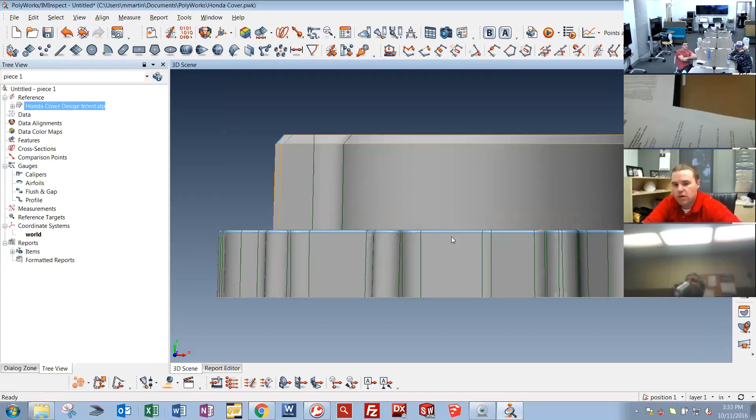Models in there. We'll go ahead and bring in the STL scan data. We scanned it with our GE CT scanner, and Josh Straden did that for me. Go ahead and bring in that.

And we're in inches down here in the lower right-hand corner. It's in inches. You can flip it to whatever units of measurement you would like. So I'm gonna keep it in inches.

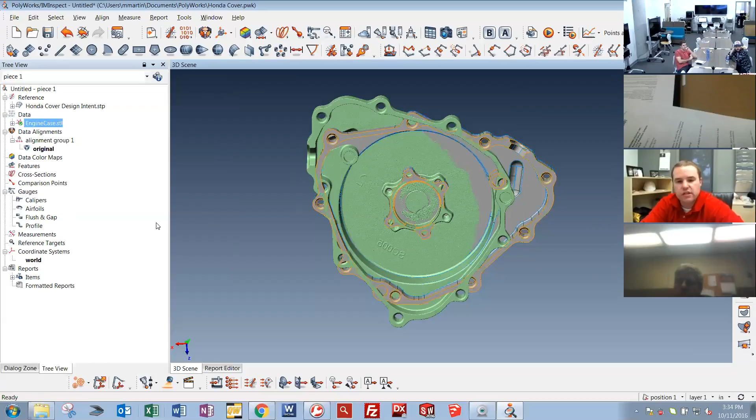So right now the gray showing is your CAD. That green, nasty green color is the scan data from the CT.

So I will run an alignment. I'll come up here to the alignment tab, which is these three little planes. I'll come down here to the best fit data to reference objects.

And I'll go through here and kind of set the settings before I run it. I like doing the pre-alignment with point pairs, just because I like controlling the initial 3 points that it picks. And then this max distance of 1 inch is way too big. We'll go down to like 30 thou.

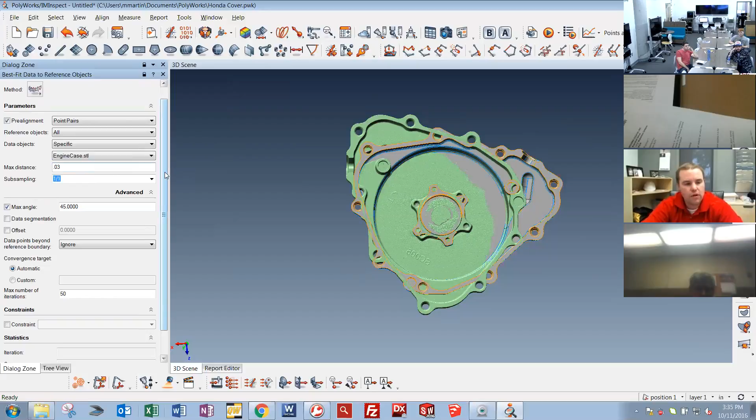You really want on your best fit, just go over a few things. You really want that a little bit bigger than your max error of your part when you're running a best fit. So you kind of want it a little bit on the higher side. And that's all set. And then we will run this.

So little brief overview of kind of what we did the last one. Go ahead and pick your 3 points. And then right click ends it, and now it's going to run through this algorithm again, running that best fit.

Close out that window, and now in the tree view, it's got the best fit to reference with the little green check. Again, means that it's programmable and ready to go if you were to change out parts.

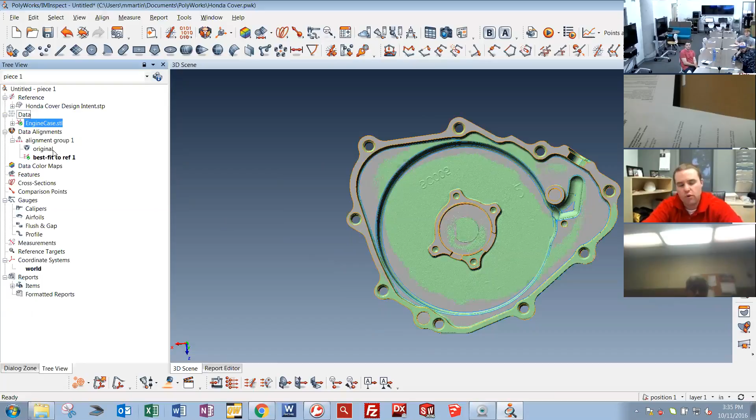I'll go ahead and apply the color map. Max distance of 1/2 inch, like way too big. Point 1 on the color map.

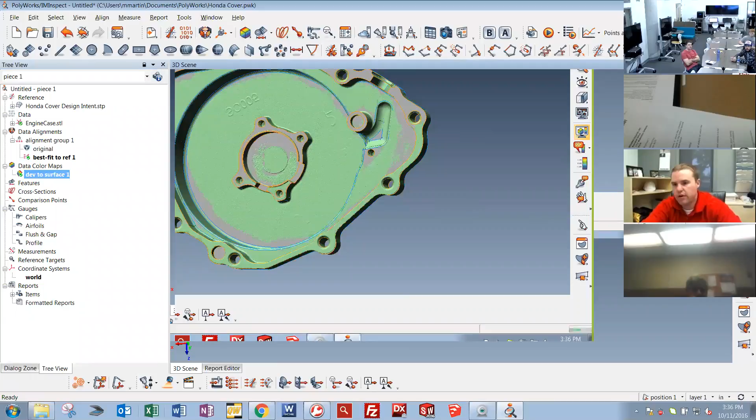And now we'll go in here, and I'm going to go ahead and adjust this scale. Right now, it's everything green is plus minus 1.5 thou. We'll probably put it at 5 thousandths.

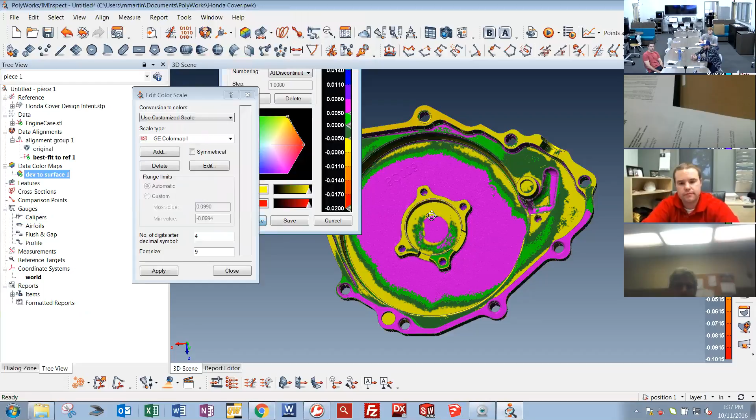And we'll put the max and min distances to like 20 thousandths. And I'll only do 5 colors in between them. That kind of makes that a little bit more realistic of what a part's going to do.

So now I'm going to turn the hide and show color map again on the right hand side. So I'll turn that off. And then, if you have a 3-button mouse, you can middle mouse click the STL in your tree view, and that's hide and show. So I'm going to hide the STL so that I can just start creating features on the CAD to do the datum alignment.

So what I'm going to do is create a plane for datum A, and then I'm going to go ahead and create a vector for datum B, running through this post, and a clocking point for datum C.

So what I'll do is come in here and create a plane feature. I'll turn on the datum feature label A, so that it gives it the automatic label. The method's going to be pick on CAD model, and right now it's single surface or multi-surface.

I'll just keep single surface since all of that is one surface. The reason you would do multi-surface is if it's broken up in the CAD, when it comes in, or the CAD modeler broke up that surface that's actually datum A or datum B or whatever feature you're picking. I'll roll the mouse over it and see how it highlights in white outline with green filled in. Click it, and then it applies, and now we have a plane there.

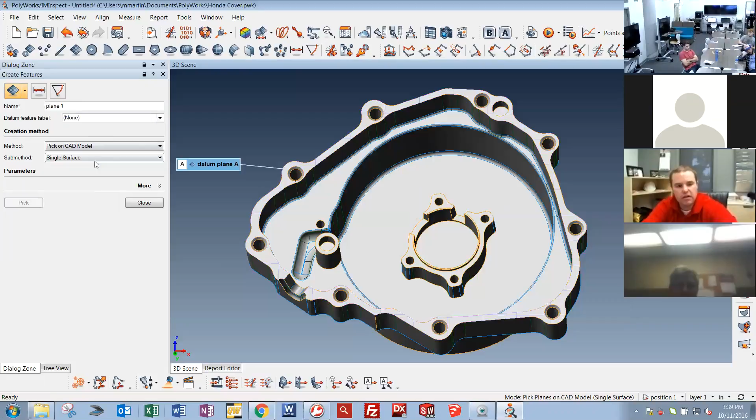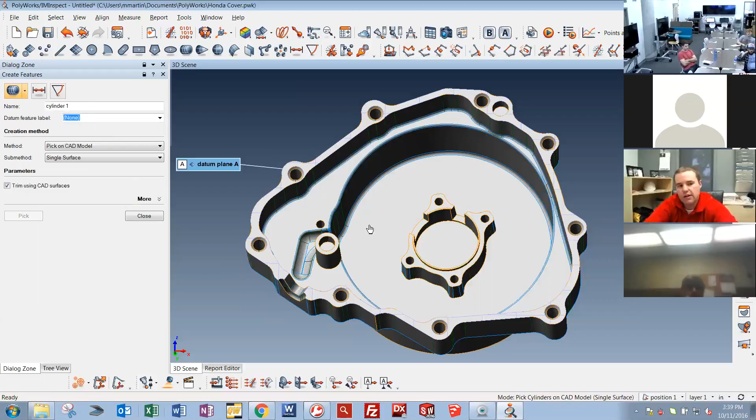I'll go ahead and change this to cylinder. We'll zoom in. So this is a pretty good example of it basically telling you it's not a cylinder, because it's not showing the green color with the white outline. So I'm going to go ahead and change this to a cone. And now it's telling me, yes, that is a cone feature that was used to create this part in CAD.

So I'll go ahead and change this to B on the datum label. Come back in here, apply that. Now we have B.

Now we'll go back up to the clocking pin for C. And what we'll do is I'll create a cylinder, just a normal cylinder called cylinder 1, by clicking that. So now we basically want this.

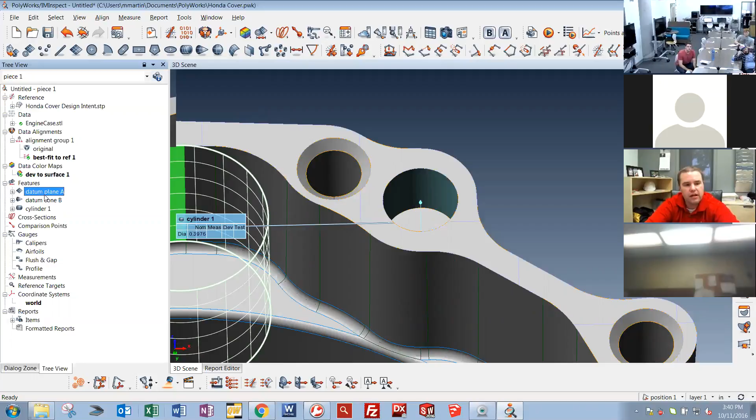intersection of the cylinder vector to the datum plane A. So what you'll want to do is select datum plane A, and then the feature it's intersecting. Have those selected in your tree view. Go up to whatever feature you want to create. We're going to create a point feature.

We're going to change the method to intersection, and the sub method of this one is going to be a plane and a cylinder. You have multiple sub methods in there to create points or create lines or create whatever you need. We'll go ahead and apply the C datum label and click create.

So now we have the 4 features used to create the 3 datums.

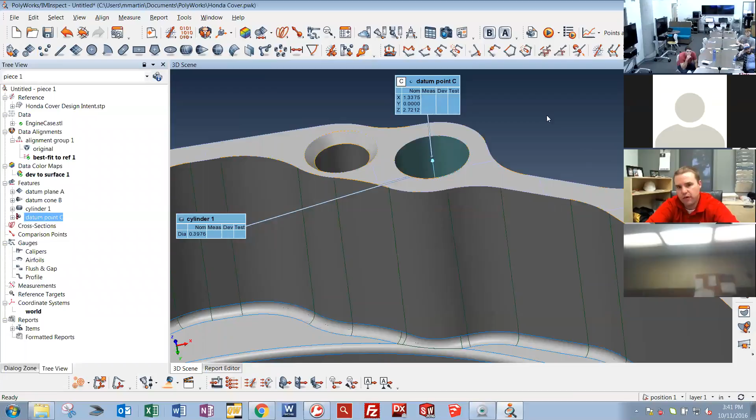What I usually do at this point, when I lay out the datum scheme first, is go back into the tree view and select all the features used to create the datum scheme.

And you can right click on all of them and go to edit group right here. That puts them all in a little group, and then I usually right click on the group and go down here to object group, rename. Now I'm going to name this alignment features. It just makes it look cleaner for people looking at your workspace.

It makes it look cleaner for anybody picking up the part. If you haven't inspected a part for a while and you come back, you can easily look in and see what the operator prior to you, or whoever programmed the part, put in that group real easy.

So now that it's all cleaned up and ready to go, we can start extracting these features, these ABC features, from the scan data to create the datum alignment.

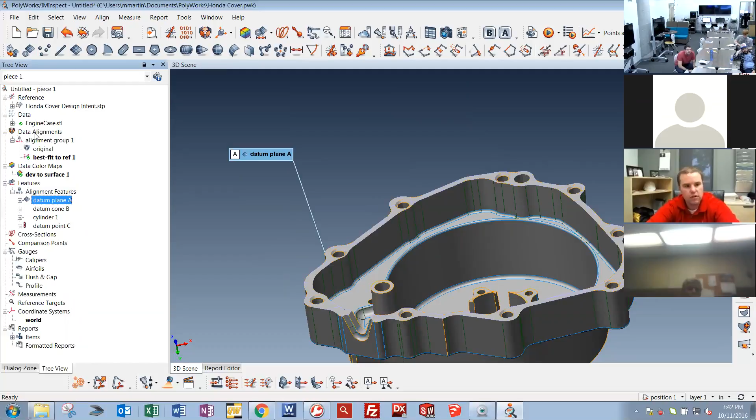So what I typically do is hide the step file, again with the middle mouse. I'll turn on the STL, right click and extract measured. Now with the little green check mark, it says it extracted it. It's ready to go.

One thing you would want to do as you look at your features in extraction is make sure that feature is extracted properly. So if you highlight the feature and hit Control M, it's going to highlight every point on that scan data in red that you used to create your plane. So you can go around and make sure there's no points, like you don't have a distance set that all of a sudden picks points down on a different elevation of where the plane should be, or that it's not picking them down here in the radius or something.

And then Control N deselects. So we'll do that on the datum B. We'll extract the measured.

And then again, make sure it's selected, Control M. Control M. And now we can kind of go back and look to see what point it used to create that feature.

Now, if for some reason you don't like it or it starts selecting points you don't want, what you do at this point is you deselect those points, and then you want to open the properties of the feature that you can start tweaking.

So we basically double click the feature, and you're going to have two tabs most times. Feature tab showing you, potentially if you have a datum label applied to it, a couple other little properties if you want, custom properties. But the main tab is going to be the measurement tab.

This is going to show you how the feature was created. We extracted it. You can CNC probe it. You can probe it or use nominal primitive. So we extracted it, we did a surface extraction.

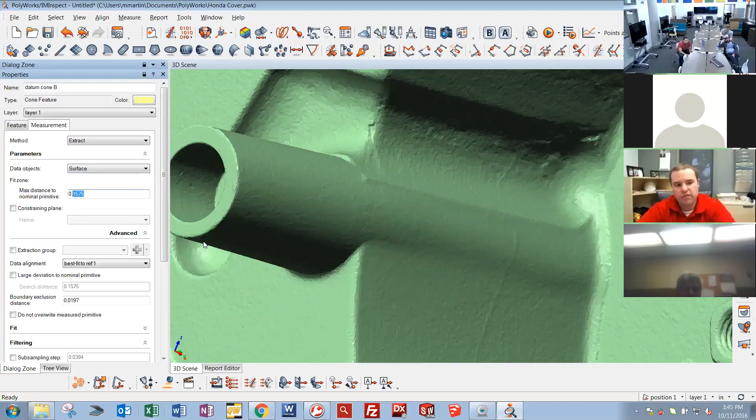And then we did the fit zone, which is a default fit zone of my settings. You can come in here and play with this fit zone, you can make it half an inch. And every time I adjust this number, in the background, because it's basically writing the program, it's readjusting that cone. So now, because I've set this max distance to half an inch, that's where it's making the cone.

So if you start readjusting, it's constantly updating, searching those points. So really, because this is a pretty accurate part, you could probably do 30 thousandths. So if we do 30 thousandths, Control M, now again you can see the points that it's looking at.

So really the main ones that we have to play with is if the max distance needs to be changed, or if you turn a constraining plane on, if you want to constrain it to a certain axis. The other one is the boundary exclusion distance. You really have to mess with this one when it's small features.

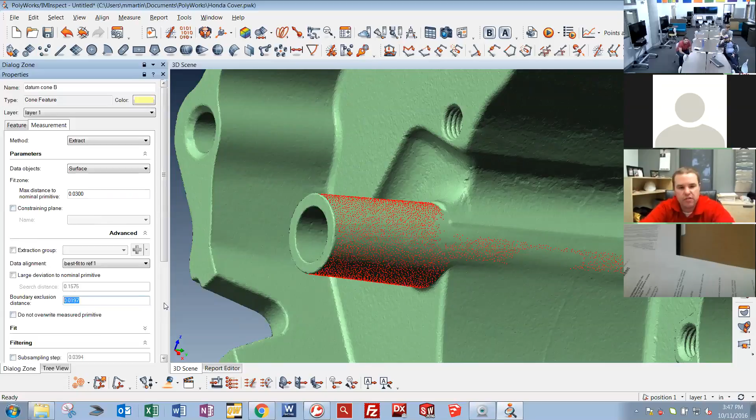When it's large features like this, it really doesn't affect the extraction. But if it's a small feature, which unfortunately we don't have any small features, like medical parts, very small like circuit board parts and stuff like that, this number needs to be really low, almost 1 thou or 2. Not almost 20 thou like it's default set to.

So depending on your part, 20 thousandths is fine for a machine part. On medical stuff, I'd definitely make that smaller, because what this does is basically deleting points from the selection to get a better sampling. And on small features, it basically deletes every point, so then it can't fit the actual feature.

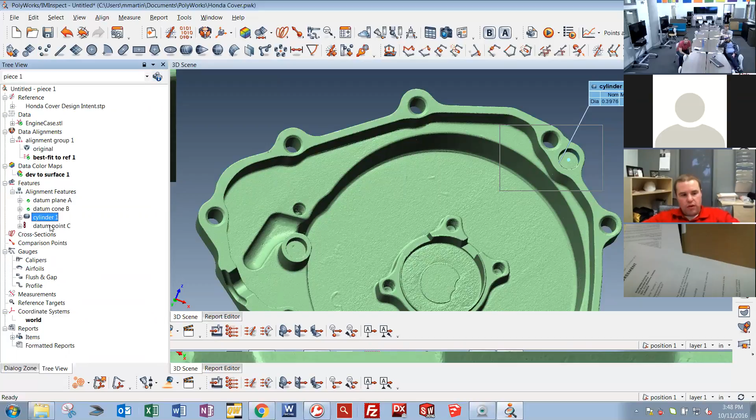Okay, and then we'll go ahead and fit this cylinder. Now, because the cylinder was used in correlation with datum plane A to make the point for C, it has this little relationship chain, which is in Polyworks called a dependency. So it's dependent upon these features being extracted. As soon as I extract cylinder 1, it'll automatically make datum point C.

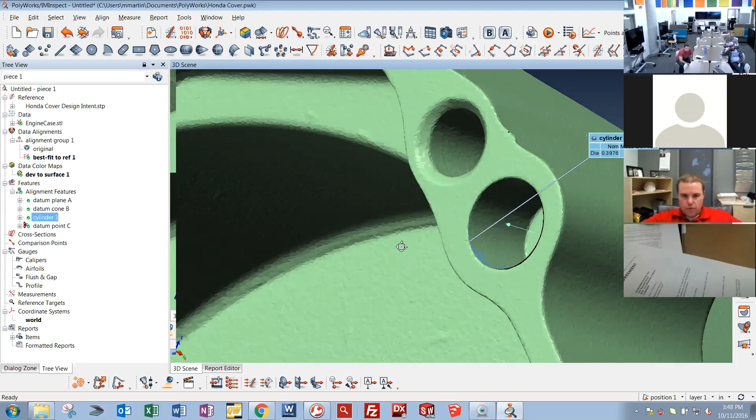And now we have the datum C nominal and measured point ready to go. So we'll go ahead and check that extraction, make sure there's no points being pulled from anywhere that I don't particularly care for. That's all good.

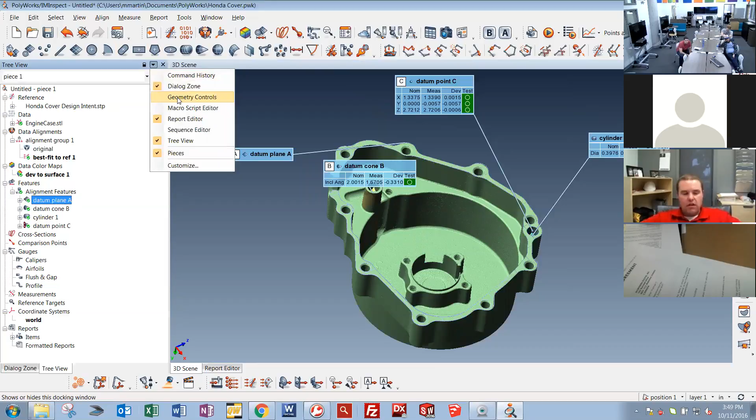What I usually do too, just to make my workspace look cleaner, is I turn off all the callouts that are on by default. So in order to do that, the easiest way is there's a little triangle menu button in the tree view. You can hit that, go down here to your Geometry Controls and open that up. So now when you go down to like datum cone B, you can see the angles turned on and it's showing up in your 3D space.

You can hit the Add Remove Dimensional Controls button and then just uncheck it. And I'll do that for the cylinder to take the diameter off. And then I'll select the datum point and turn off the XYZ of that datum point. Again, this is just personal preference stuff that I kind of do when I'm setting up a first article inspection. And if you hold Alt, you can move these anywhere you want.

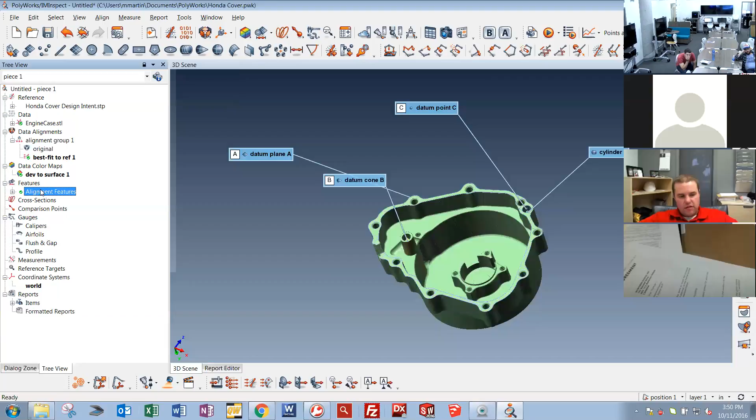So now, since we have all those extracted, I can now run the datum alignment. Come down here to the very bottom, the datum reference frame alignment. We'll go ahead and do a create. Again, you can create your ABC alignment any way you want it. We could do CBA, BCA. We'll just do an ABC. As soon as you create it, it's up here as one you can select.

And we'll click Align. It automatically, that little bar that went off pretty quickly, updated the deviation map to show the deviation now in the datum alignment. So now if we right click and say activate on the best fit, because now you have a datum reference frame alignment ABC and the best fit, activate. There's your best fit. Activate the ABC again. I can definitely see some differences in the color map for sure.

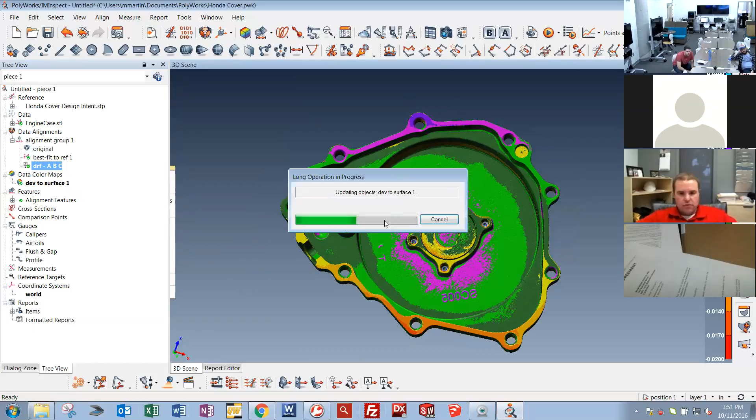So now we'll create some more features on this thing and start pulling some dimensions. Go ahead and turn off the color map, turn off the STL, and turn on the design intent.

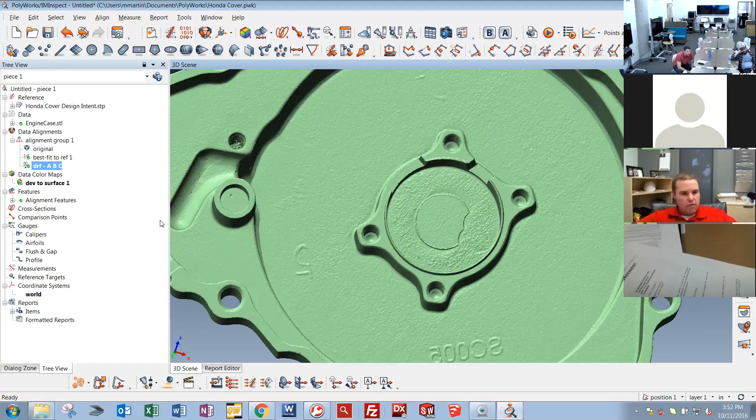What I want to do next is create a pattern on these four locator threaded bolts. I believe they're threaded in the scan data. Yes, they are. So what I will do is create 4 cylinders.

Go ahead and hit the Create Cylinder button. Again, the method is pick on CAD. It's the easiest method you'll do in Polyworks, pick on CAD when you have a nice CAD file. You can just go around and basically with 1 or 2 clicks get all the stuff you need.

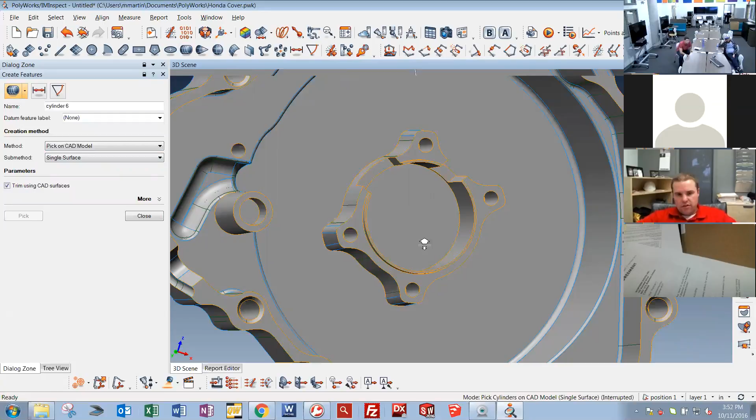Now that I have these cylinders created, you can create a pattern by selecting them all in the tree view and hitting your create pattern feature. Most of the time a pattern is another datum, so I'll just name it datum D4. Now it automatically ropes all of the 4 cylinders into that pattern. So you can apply this.

Basically what the pattern gives you the ability to do is apply, like a lot of times you'll see a pattern of bolt holes that have a true position back to A applied, or some type of call out. Usually it's a GD&T call out in the pattern.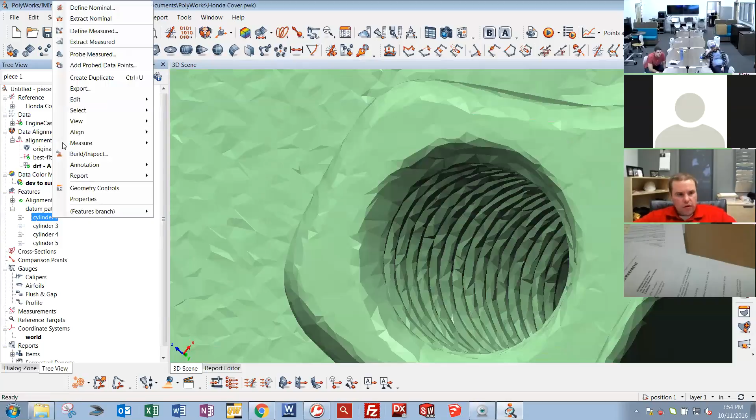So now these will be a little bit different extracting because they are on threaded areas. So we'll just start with, I don't know if you guys can kind of see that the CT data got all, there's little threads in there. So we would go ahead and just start extracting.

This one I definitely want to check because of the threads. There's definitely a difference in there, but what you can do is hit this plus sign on cylinder 2 and actually open up and see the nominal and measured cylinders by themselves. I'm going to middle mouse click on that nominal to hide it, and now I can really look to see how that cylinder 2 measured data is fitting visually.

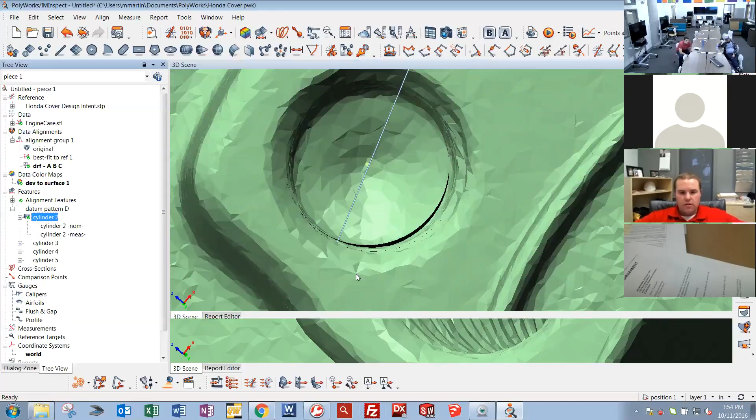And then I'll turn it off again so I can do the Control M to really look at how it's fitting. I particularly don't like doing a best fit on a threaded hole, I'd rather do a min fit.

So what I'll do is go into the features of the cylinder, into the measurement tab, and I will change the fit settings. Below the boundary exclusion distance we went over before is this fit tab. You can open it up and you've got fit types: best fit, min fit, max fit, with the ability to change it. I really like doing the min fit on the threaded hole, so I'll go ahead and change it.

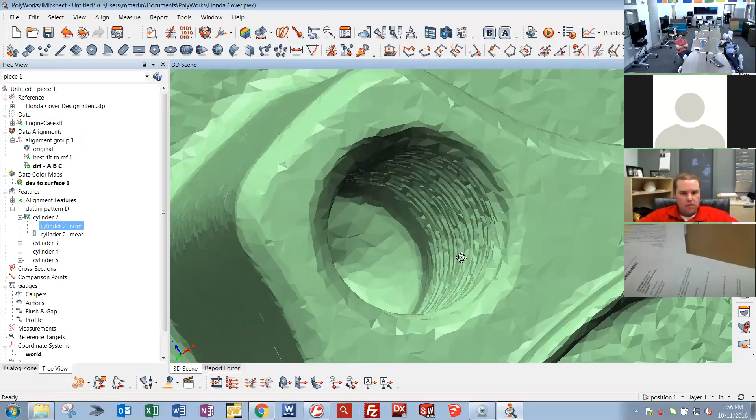It's in red telling me I've made a change but haven't applied it yet, so you can either hit enter or hit the apply button down here. Now it's applied, and now it's fitting, just barely hitting those grooves of the screw hole, the threads. So now I know that's a pretty good setting.

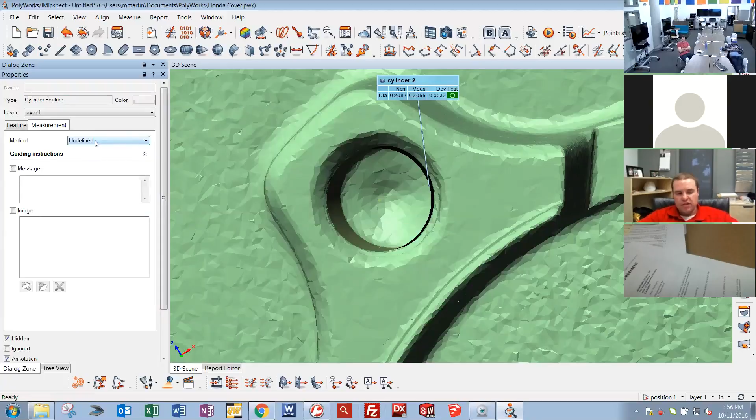I'll go ahead and select the next 3 cylinders all at once, right click and go to properties on those, then go to measurement. Because I haven't extracted any of these, it's asking me, the measurement is now undefined on the other 3 I haven't done. So I'll change this to extract, and then also come down here and change that to min. Go ahead and get that all set up, so now when I extract these, they will all be min fit cylinders.

So you can select them all at one time and just hit extract. We'll go ahead and turn off the nominal cylinders and just make sure those cylinders are fitting in there pretty nicely. Yep, this will look pretty good.

So now we have our 4 cylinders, got the pattern turned on as well. But now I want to create a couple more, 4 circles around this thing as well. So I'm going to end up creating a plane, a multi-surface plane, and then go ahead and create the circles from that.

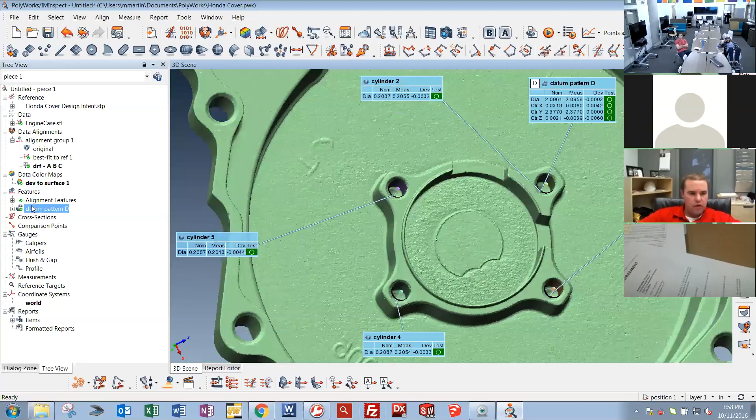So we'll go ahead and turn off all that, turn off the STL, turn back on our CAD cover. I'm going to fit a plane, pick a plane. Right now I have it on single surface, but really I want to make sure I get this surface as well over here, so I'm going to change the sub method to multi-surface.

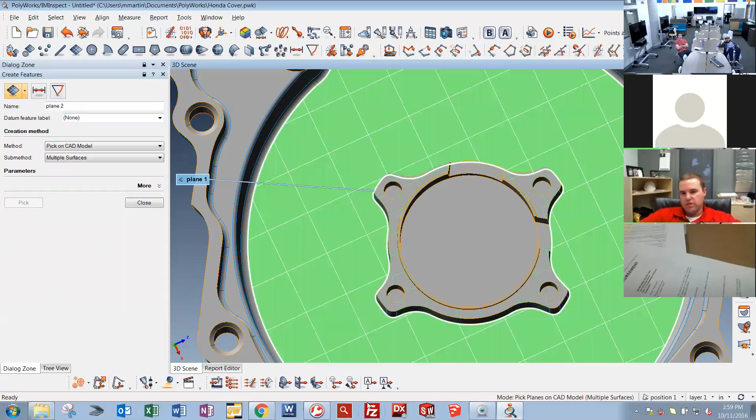So you'll click once, and now I can add this surface over here, so now it's got both surfaces selected. You click it, left click again, and then right click to end the selection. So now it's got that entire surface being used as plane one.

We'll go ahead and extract that plane as well, and do a quick check of the plane, make sure those points are not being taken down in those holes, which would be my biggest concern.

Now what we'll do is we'll create the 4 circles from the intersection of the plane and cylinder. So I'll select all the cylinders, select the plane in the tree view, go back up to the circle feature. We'll change the method to from intersection, plane and cylinders, click create.

Now kind of a tip is, if for some reason it says it cannot create a circle from the cylinder or from the intersection of the cylinder and plane or cone and plane, what it's really telling you is it's not a true circle from that intersection. So if you just change it to create a slot or an ellipse, is what Polyworks calls it, it'll create an ellipse. It's just not a perfect circle, and that's an error sometimes that pops up in Polyworks, more or less telling you that your intersection point is not perfect, so you therefore need to create it as an ellipse and not a circle.

So now we have those 4 circles created that, again, measurements may need to be pulled off of the circles, or just getting the XYZ points of that exact location of the top of that threaded hole compared to the plane surface.

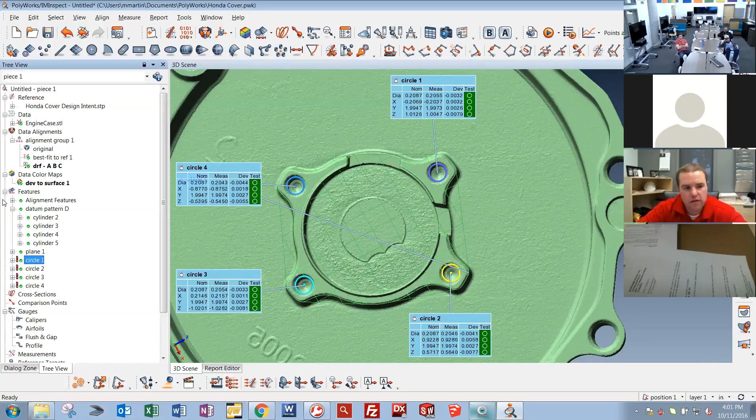Now what I can show you is, say you didn't have any CAD and you had to actually still take measurements. So we'll go on the back side for this. Say you needed to define this plane and this plane because you wanted to take an overall height measurement. So what you would do is, if you didn't have the ability to have CAD for it, which makes it easier because we pick on CAD and then extract, you would actually have to go in here and create the plane feature.

Change the method to fit, and at this point you would want to set up all your settings. So do you want a best fit plane, a mid plane, max plane? Same thing with cylinders or cones. The max angle, do you want that on? Usually yes, because you don't want it to be backwards facing. Do you want reject outliers, it's on by default, and that's pretty good, 5% of points. The subsampling step, sometimes if you have a huge surface that you're trying to fit a feature, you might want to turn that on to sample it down a little bit.

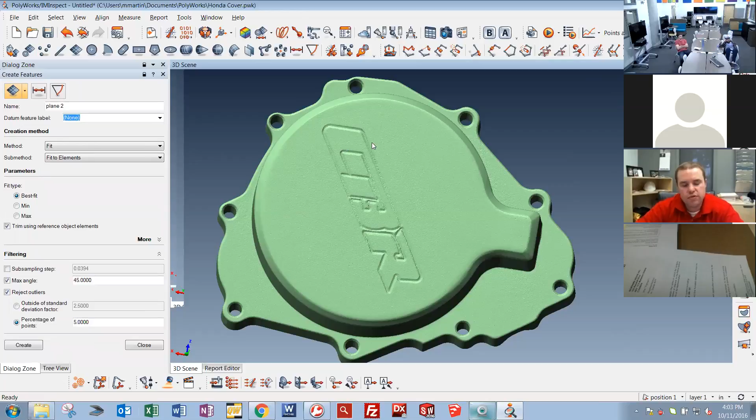So once you get all your settings, the right type of fit, you'll come in here and hit the space bar. That turns on the selection ability of your little ring. Now you can come in here and hit your left mouse key and start basically doing a slide selection, just basically painting the surface where you want that plane to fit and what points you want that plane to use on the fit. So once you've got all your points selected, you just hit create. And now your feature is created.

What you'll notice when you're doing this is it's no longer like a trimmed surface that you can use. Now it's kind of just an oddball looking feature. So we'll go ahead and do it again down here.

So it's a lot more time consuming if you don't have CAD to take measurements. It's something on the service side for Exact that, if we have CAD, we know it's going to be quicker doing a first article. If the client doesn't have the CAD model, we have to take that into consideration when doing these, because it's a lot more man hours spent of the guys going in there and selecting the features manually and doing this kind of work and building. Whereas if we have the CAD model, it's an easy click and you can get your settings set.

So I got a pretty good sampling on that surface. We'll go ahead and just do a best fit. Create. Now that plane is down here. And you're still doing the same type of application. You can go back in and do the Control M and look at the points that were used to create that feature. So that's still relevant, and you're able to use that.

One thing to take in mind, depending on the technology you're using, the method, we did pick on CAD, we did fit. You can do anchor, and anchor basically is anchoring 3 points. So anchoring, you would come back in here and say, I want this point, and this point, and it's going to anchor, it's going to build a plane based off those 3 points. You can also do pick one on the surface, pick one on the reference boundary. Those are options if you need them.

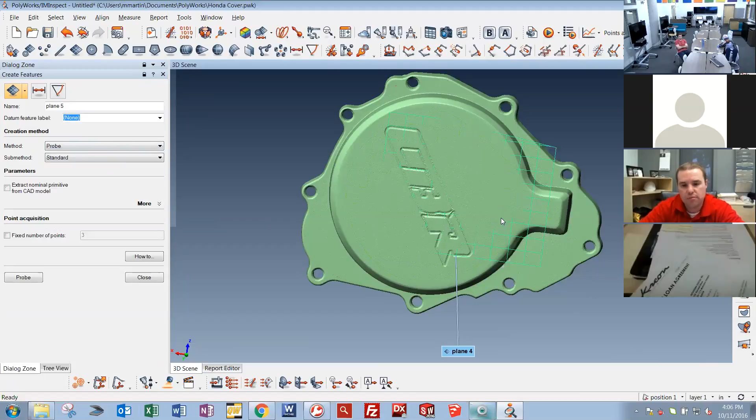The other big option is probing. If you have a Romer arm, you can change this to probing, plug in your Romer arm, and basically start probing all kinds of points to create a plane, just like a traditional CMM.

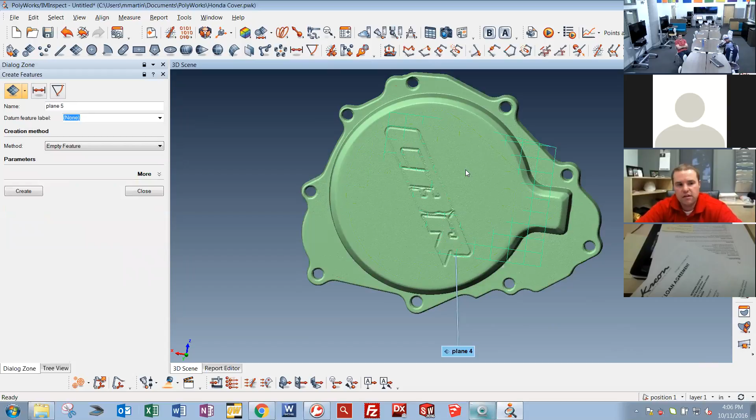The numeric, the empty feature is used for when you need to do a little bit of programming. We actually had to use it today for a part when we were creating a probe, simulating a probe type of thing, where we had to create a little sphere.

And again, from objects is the other one, and that's a sub-method of basically how am I going to create that plane. Is it going to be from the center points of circles? Is it going to be from a point in a line orientation? I bet you there's 20 to 30 ways per feature to get created.

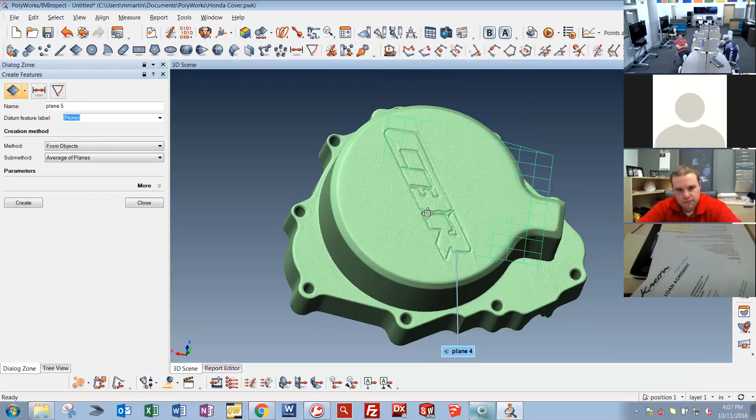So if you say from objects, we can do that one real quick. If I take these 4 circles, and they're all moved around, what we'll do is create 4 points, and then I can use those points to create a plane on the feature. So from objects, create points from objects, circle centers, create. And we'll use those same points to create a plane.

So really, Polyworks gives you the ability to build features off of features. You just have to go about it in the right kind of steps and know the right features and what they are.

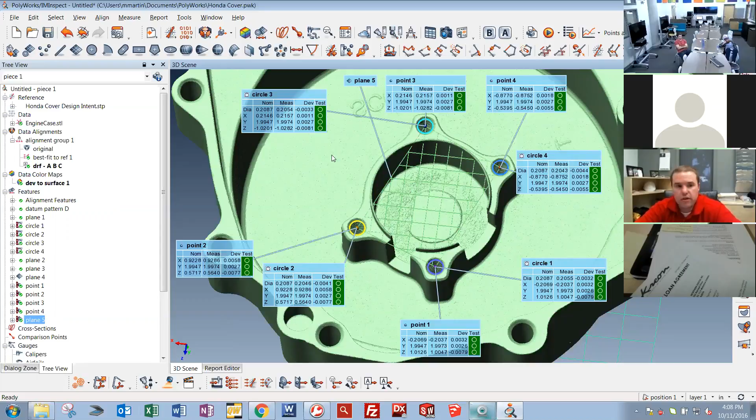Some issues you'll run into are with CAD files. You'll think the feature should be a cylinder and it wants to fit a cone. And like I said before, sometimes you'll think the feature is a circle and it will want to fit a slot. That's just the way the CAD model is. That's not an issue with the translator in Polyworks, it's just how the CAD model was built in the CAD package of choice.

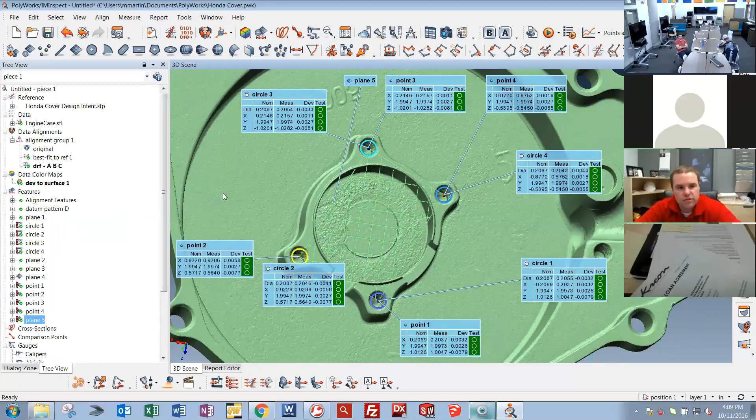There's a couple other special features they've introduced lately. One is, we'll pick this surface here, the Create Surface feature. This is mainly used for surface profile GD&T callouts, and they give you three options, but one main option is with the CAD model, which is reference elements. So it's basically asking you to select the reference element that you want this feature to be. If you hit the middle mouse button again, you can select all the features you want to be a surface feature.

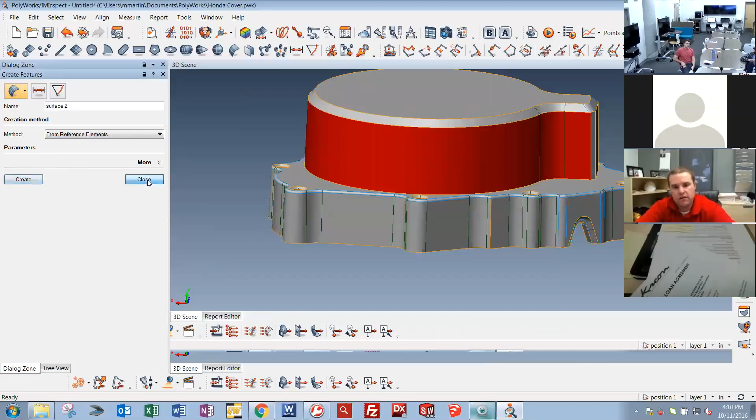So now we want those 5 features to be a surface feature. You hit create, and now I'm going to hide the CAD model. That is one surface feature. Now you can apply an overall surface tolerance to it. The surface profile callout, maybe this has a 1.5 thou surface profile tolerance on it, and this is how you would apply it just to that surface.

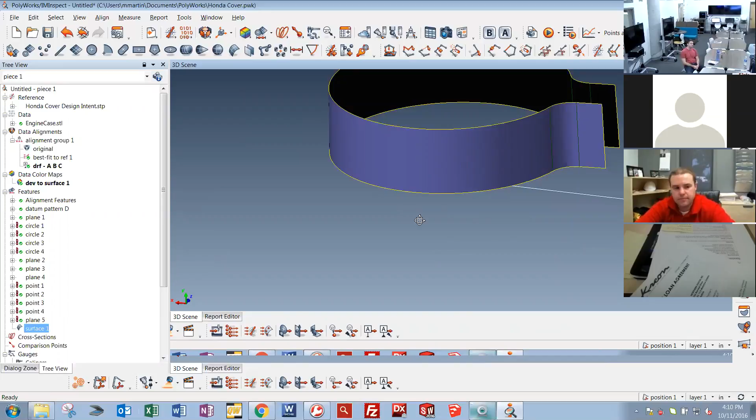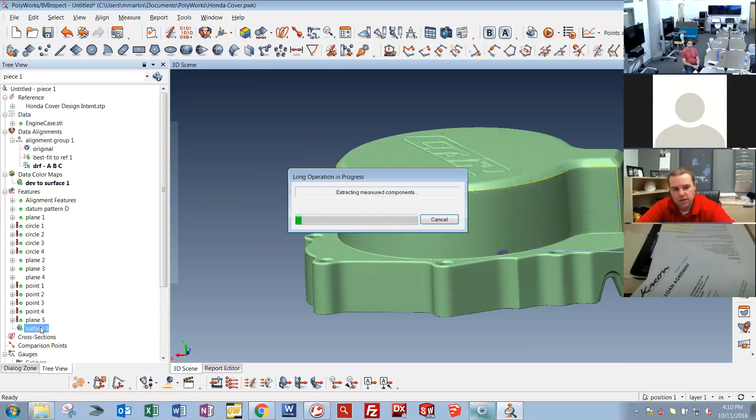We'll go ahead and extract that surface from the points. Same thing, right click, extract measured, hide this. And if you notice, you can't really see, there's no plus sign by the surface to show you the measured. So what you have to do is really look at the points and kind of see exactly where it's pulling from.

That looks like it pulled it pretty good. It's a little tight, getting a little close to that radius down there, but we'll leave it go for now. Because you can't look at the features compared to each other visually, you definitely have to look at the points and how it's getting pulled. And that one was specifically introduced for surface profile, I believe, at the time.

The other one is the new slab feature, called Create Slab feature, and you have to create 2 planes. Let's see if I even have the ability to create a slab. They have to be parallel planes to each other.

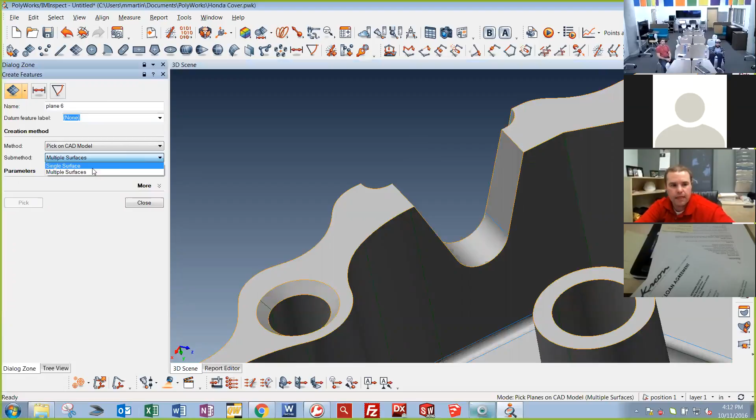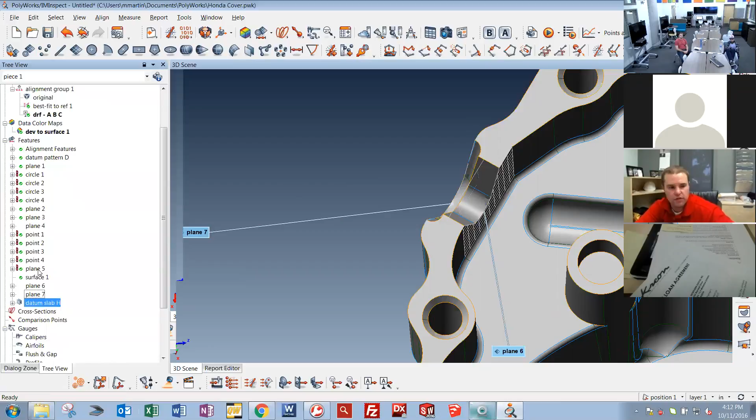That's why it's kind of introduced, because it's on a lot of drawings, that's what they're used for. Should see if it'll let me. Yep, went ahead and created it. So now it's in there, it's kind of a different looking feature than the plane.

Go ahead, let me hide it, so I can kind of see the slab feature is the dotted line. The planes used to create the slab are the checkerboard looking ones. Go ahead and extract. Yeah, that's a better view. Got the checkerboard here, the dotted line here - that tells me that's the slab plane. That's just more for visual, for Polyworks it's visual.

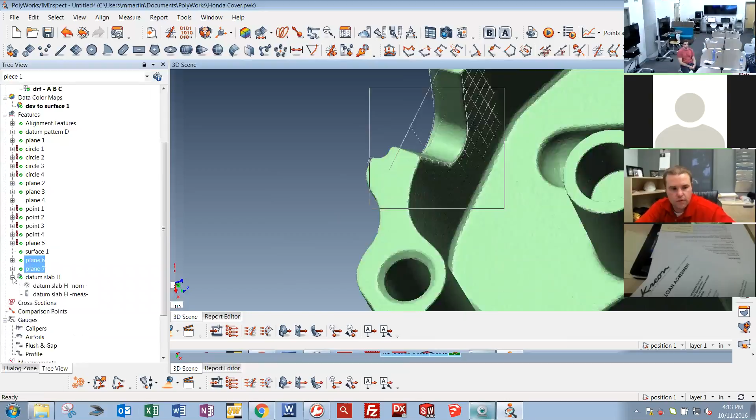Does anybody have any questions so far? I know it's already 4:15.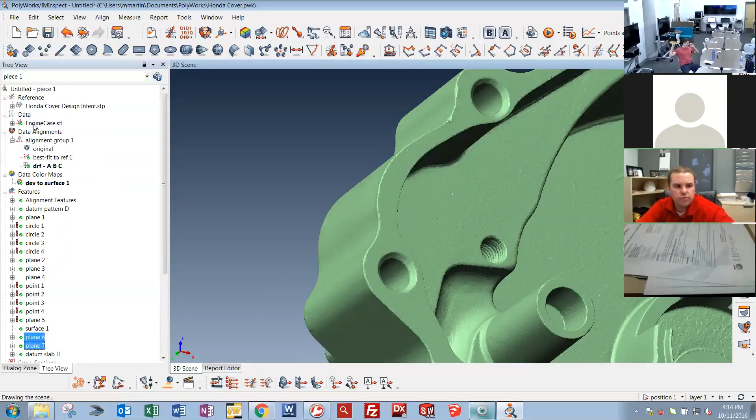The other kind of features, just to show you if they're 3D or 2D - the ones with these little plus signs are kind of 2D features. The 3D features are the ones that have more of a rendered look in PolyWorks.

The arc feature is a newer feature as well. You have to do an arc on a cross section. So we'll go ahead and do that as the last feature to show you today - the arc.

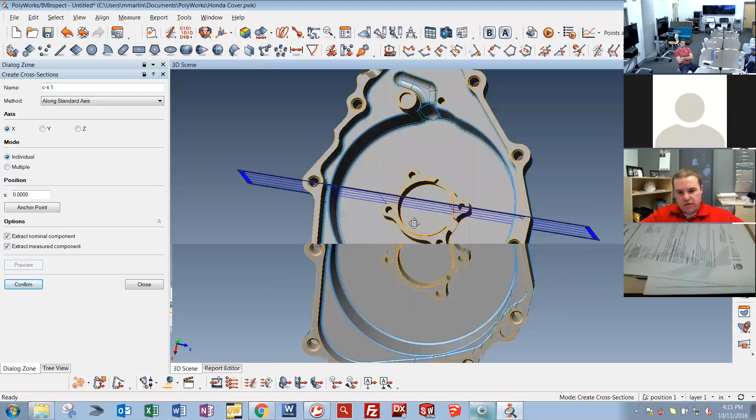Go ahead and I'll just create a cross section somewhere. That's a pretty good one. So create cross sections - let's go up into create standard cross section. Right now I'm in the X individual mode. Preview shows me where the cross section is going to be taken, and I'll just confirm it. Now I have a cross section that's nominal and measured.

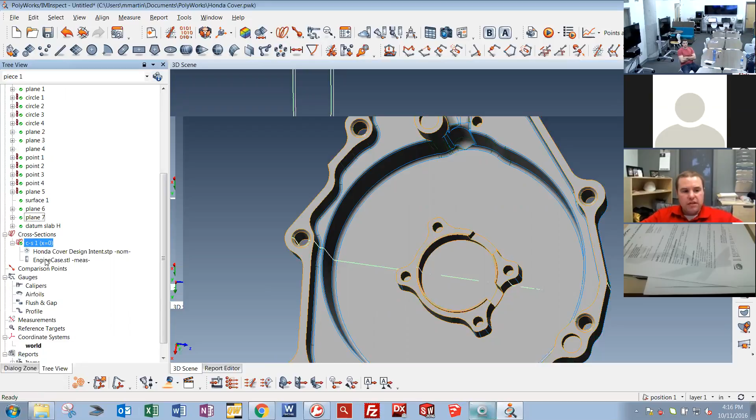Again, the colors represent the CAD to the STL. So it puts it down here in the cross section, underneath the cross sections. Hit the plus sign, now you've got your nominal and measured cross section. I'm going to middle mouse click the measured engine casing, and now basically I'm just looking at the gray of the CAD.

Come up here and create arc feature. It automatically selects cross section 1 because that's the only cross section I have. I'll see if I can pick on CAD - so pick on CAD, it's saying there's a perfect arc right there. Go ahead and create that one.

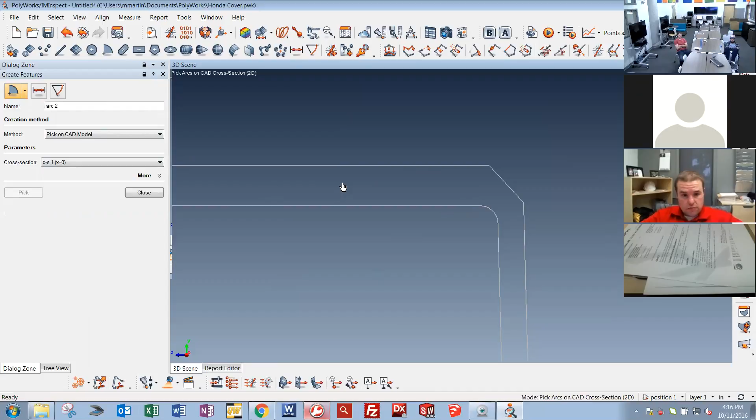Create one on this side as well. So now I have 2 arcs created. What's really nice about PolyWorks is it organizes it - it shows you that yes, you have 2 arcs created in your tree view, but they're also tied to cross section 1, which is basically in the X direction at the 0 position. So it organizes your tree view really well.

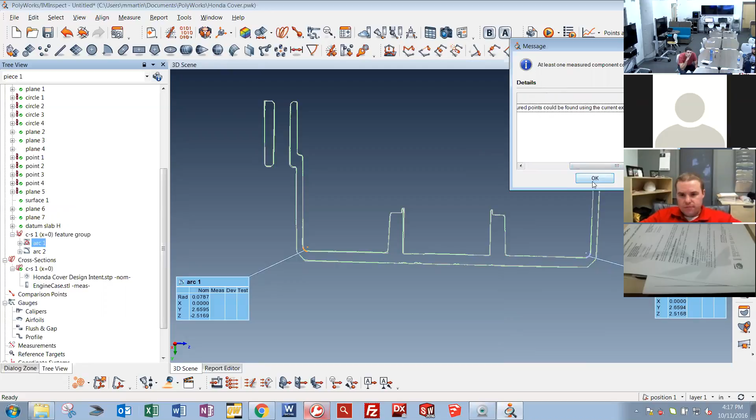All right, go ahead and turn the measured back on, then we'll right click and extract the measured. You'll end up getting this message saying it can't extract - no measured data points could be found in the current extraction parameters. So we'll go in here and investigate why this is not wanting to extract.

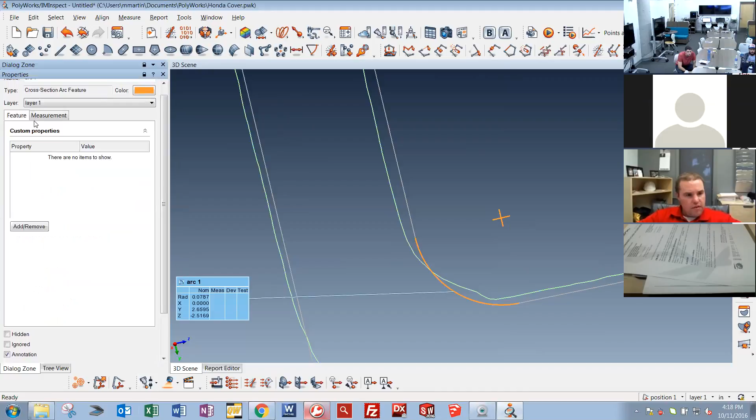So now we want to double click arc 1, and double clicking gets you into the properties - extract from cross section, distance. I'm going to change this boundary exclusion distance down to like 2 thousandths, and I think I'm going to take reject outliers off as well. Set that, and then maybe turn off this distance to see if I can get it to find the exact location of that.

That's 0. Oh, there's also a setting in here, extract from best fit cross section. So if you wanted to view the cross section in the best fit - like how it looks in the best fit - you could double click your cross section 1 in the tree view. I believe on the cross-section tab there's a best fit option. If I check that and hit enter, now it's showing me the best fit look of how that's getting, basically, what the range of that cross-section is.

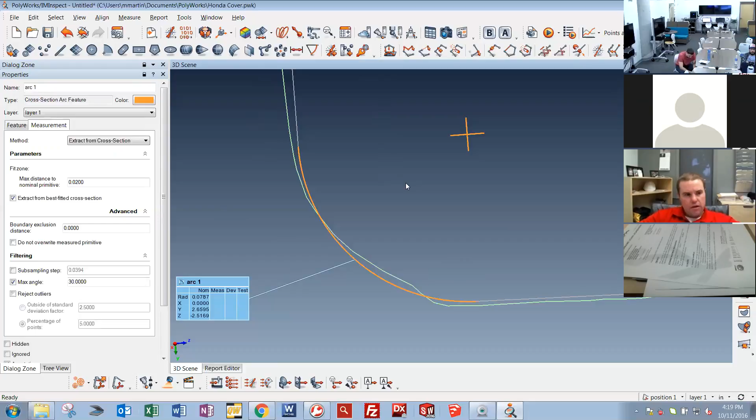It says max distance - I changed it down to 20 thousandths, and it was able to now fit an arc there. We'll do the same on the other side.

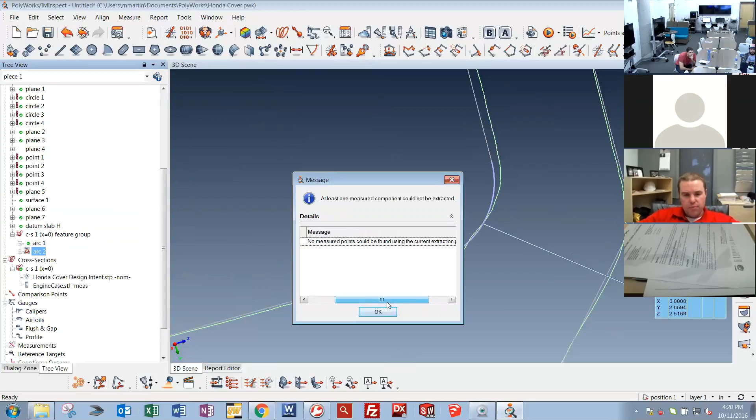This one I'm assuming is going to error out as well. Yep, make sure it's the same error - yes, no measured points could be found using the current extraction parameters. So again, you're going to want to investigate. Double click gets you in the properties, go to the measurement tab.

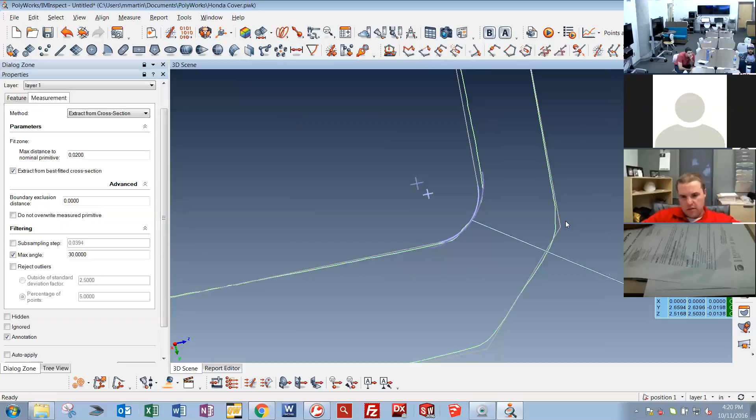Now you know, if you had a series of arcs, you would probably want to set this up going forward, selecting them all, because you know the settings now. Take the boundary exclusion down to super small, turn off reject outliers, make this a little bit smaller to 20 thousandths. So now it extracted. You know it extracted, you know how it's fitting - you've got the cross section in the best fit, so you can see what the software is doing in the background to fit that arc.

So now we have those extracted as well. But just remember, the arcs have to be on cross sections - you can't just randomly pick on this CAD file wanting an arc wherever you're basically anchoring it. The software will not allow it. You have to take a cross section cut through where you want it.

So that's basically all I've got. I left a little time, 10 minutes or so, for questions if there's anything anybody wants to ask or review.

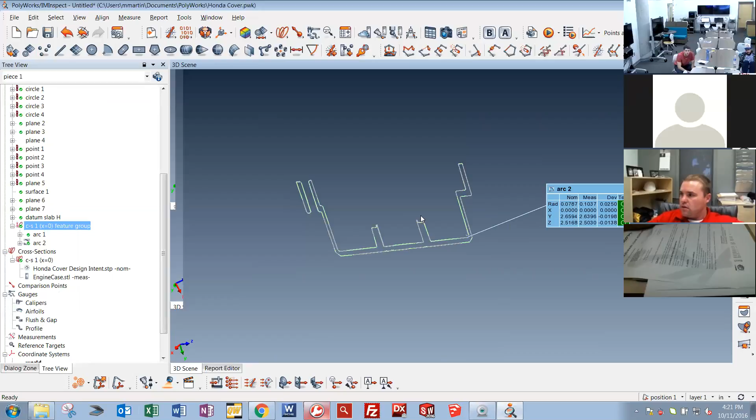That's all I have, unless somebody has a question or anything. So.